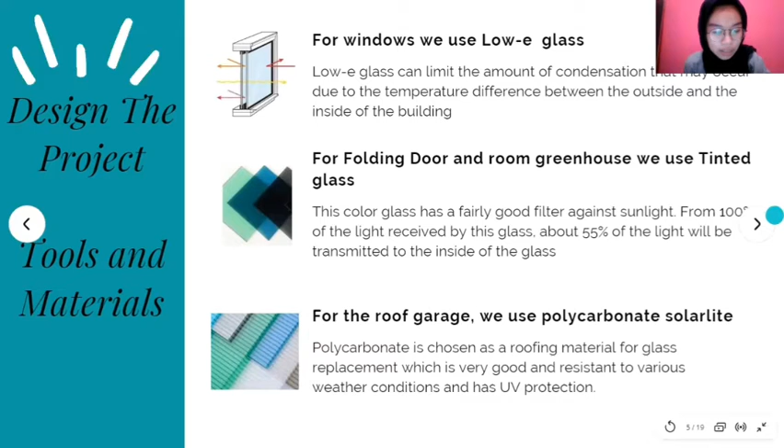Next, for the floor, we use linoleum. Linoleum is made from dried and milled flaxseed mixed with other plant material, including pine resins, wood flour, and ground cork, with a jute backing, all completely natural materials which come from renewable sources and are 100% biodegradable. All byproducts and waste are milled and used.

Linoleum doesn't fade, as the pigments are embedded in the structure. It is anti-static, repelling dirt, dust, and other small particles, making it hypoallergenic. For this reason, it is often used by people with respiratory issues such as asthma or allergies. It is also fire resistant and does not require additional finishing.

And then, the rainwater tank. Rainwater tanks help utilities reduce peak demands during summer months, saving treated water for more important and appropriate water use, and can also reduce stormwater runoff from a property. The elimination of runoff can reduce contamination of surface water with pesticides, sediments, metals, and fertilizers. Rainwater harvesting can help you save money on your water bills and store water in an economic way.

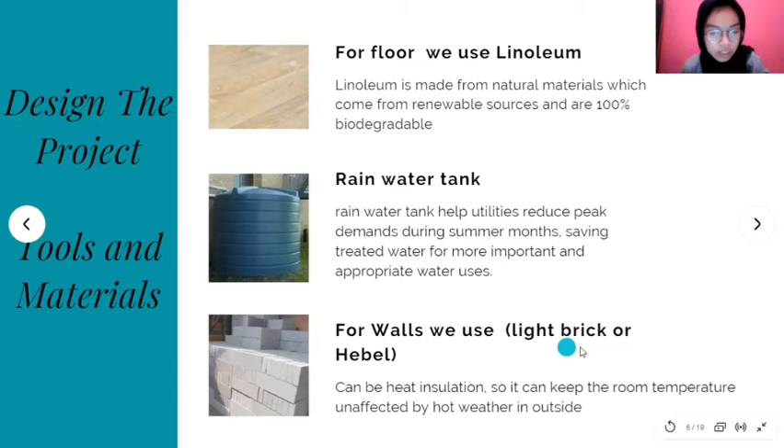And then for walls, we use light brick, or hebel, because hebel can first minimize the possibility of water seepage, since it is watertight. It can also provide heat insulation, keeping the room temperature unaffected by hot weather outside, and has good resistance to fire, so it's not flammable. It's suitable for installation in emergency staircase areas or core lifts.

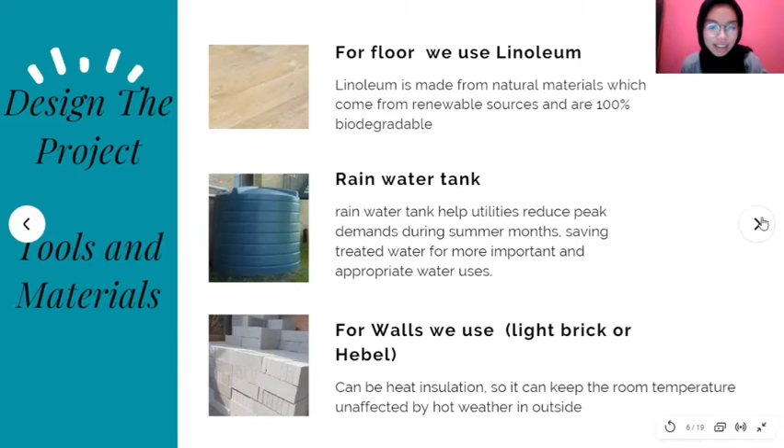And the last is heat insulation, so it can keep the room temperature unaffected by hot weather outside. And then next is for roof. For roof, we use UPVC roof materials, or we can call UPVC roofing.

The quality of UPVC roofing is undoubtedly good because it is resistant to weather. In addition, UPVC roofing material is resistant to the erosion of chemicals and doesn't contain toxic material such as BPA, which is harmful to the health of the human body. UPVC doesn't contain plastic-making additives, hence its name is unplasticized polyvinyl chloride. UPVC also has a more rigid and sturdy character and also can reduce heat from the sunlight.

Solar panels help to provide sustainable electricity for any use. Installing solar helps combat greenhouse gas emissions and reduce collective dependence on fossil fuel.

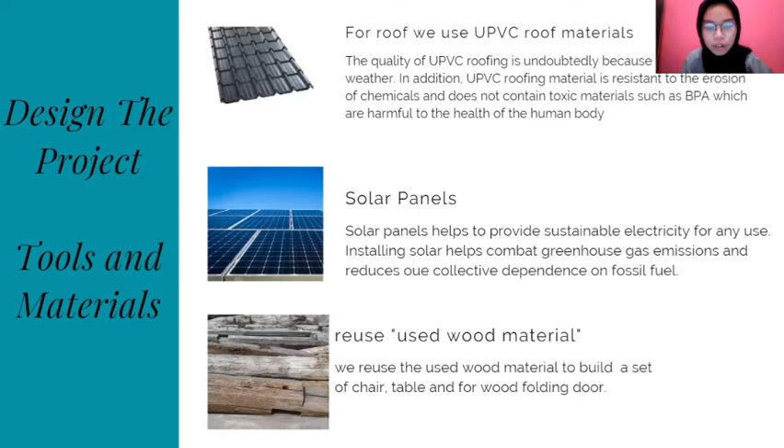And the last is reuse used wood material. We reuse the used wood material to build a set of chair, table, and wood folding door. Next slide will be explained by Rahmi.

Compared with other projects, the novelty of our project compared to common home projects is that we use a lot of windows and doors, which are designed, and also use folding doors made of glass to maximize the incoming light and provide ample air ventilation.

We also add solar panels for energy sources and build rainwater tanks to collect rainwater to be used as water for washing clothes or dishes. The floor is also designed using natural material, linoleum, which is durable and environmentally friendly. Materials such as table, chair, and folding door used wood material.

And around the house we plant trees.

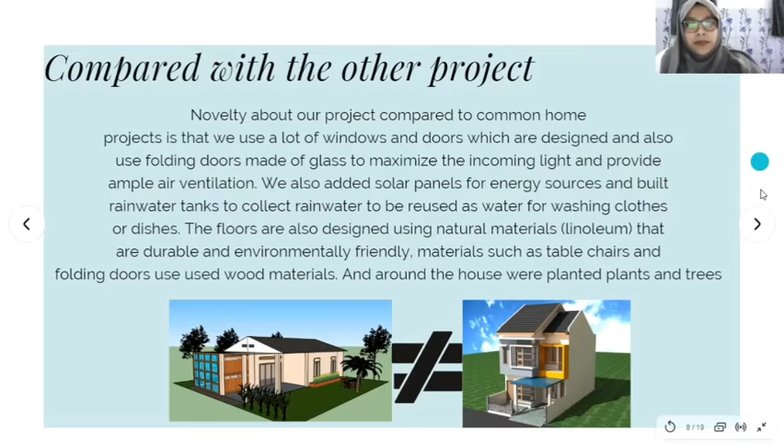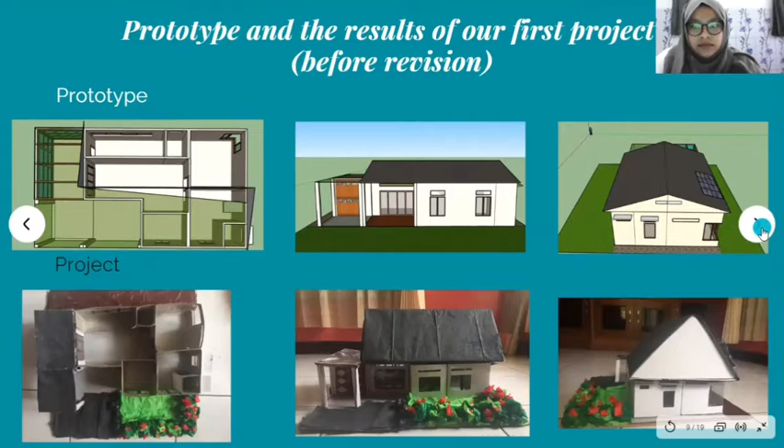So here is the prototype and the result of our first project before revision. So this is the prototype and this is the project. This is the top view, this is front house view, and this is left side view.

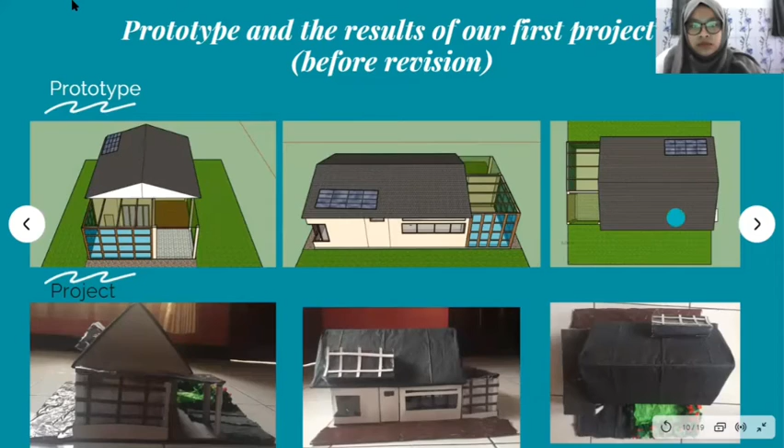Next is revision. In the first project, we only focused on the house, lacking focus on other tools, and we did not explain the material used and did not add trees around the house area.

But in the second project, we try to make a mini garden around the house and also put some trees. And we try to choose the material and tools that are suitable.

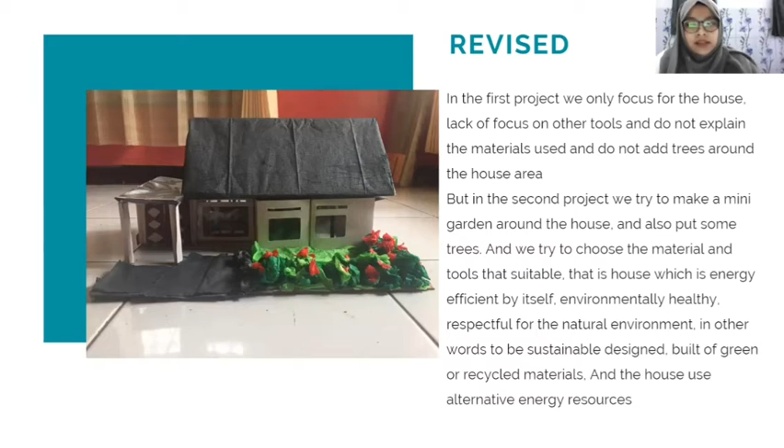That is a house which is energy efficient by itself, environmentally healthy, and respectful of the natural environment. In other words, a sustainable design built of green or recycled material, and the house uses alternative energy resources.

So the next slide will explain the prototype and the revised project, or the final project, presented by Rahmi.

As my friends told before, we use folding doors with tinted glass, and the window that we use is low-E glass, made from wood materials. It is recycled from used goods. And here is our project.

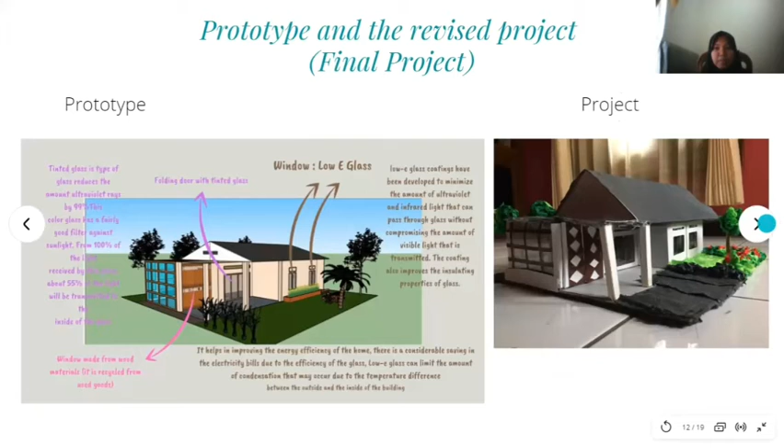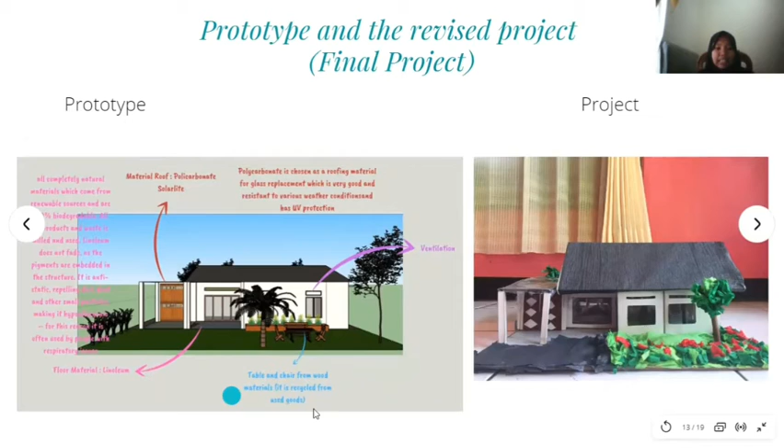The next material, the roof we use is polycarbonate Solarlite, and the floor material is linoleum. Here we use table and chair from wood materials, recycled from used goods. And here is the picture of our project.

Here we use ventilation, and as I told before, the window that we use is low-E glass. And here is the picture of our project.

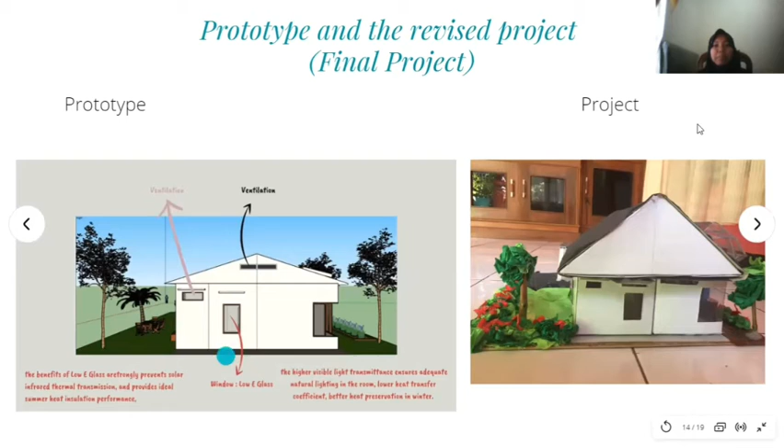We use mini ventilation in our project, and we also use a rainwater collection tank, or rainwater harvesting. And here is the picture of our project.

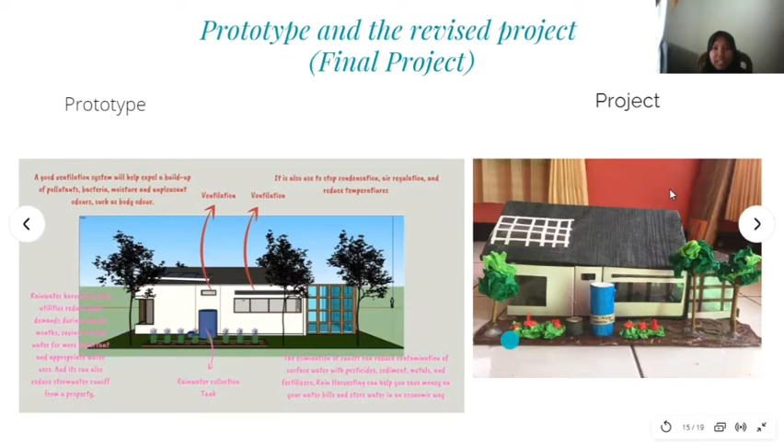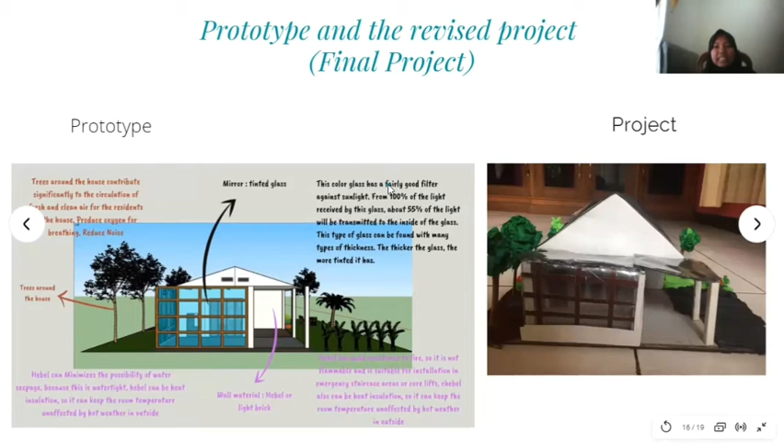And for the right side view, we use mirror. The mirror we use is tinted glass, and we also put trees around the house. And here is the picture of our project.

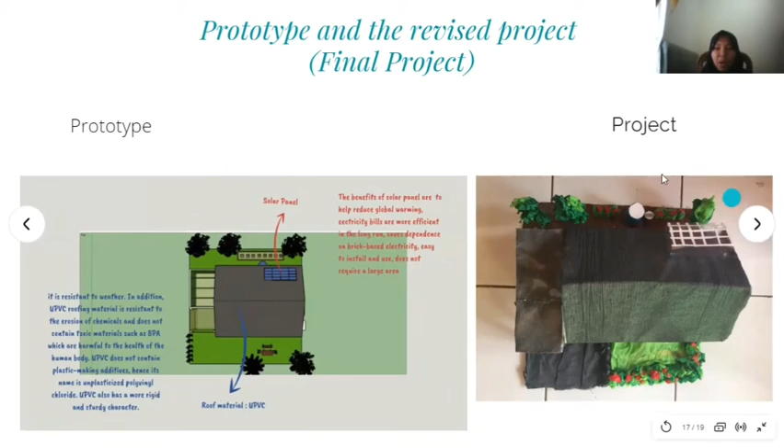And for the top view, we use solar panels, and for the roof material, we use UPVC. And here is the picture of our project from the top view.

Our project also has advantages. One advantage is that we use high mass building materials such as hebel and wood. This is designed so that the building experiences much lower temperature fluctuation between day and night, making the house more livable and reducing cooling costs.

Also, using glass material to transmit light into the house optimally, and the glass material used is also quite safe because it reduces ultraviolet radiation from the sunlight. We add more ventilation that can help expel a buildup of pollutants. We utilize solar panels to help provide sustainable electricity and rainwater tanks for reuse, and also use environmentally friendly flooring with linoleum materials.

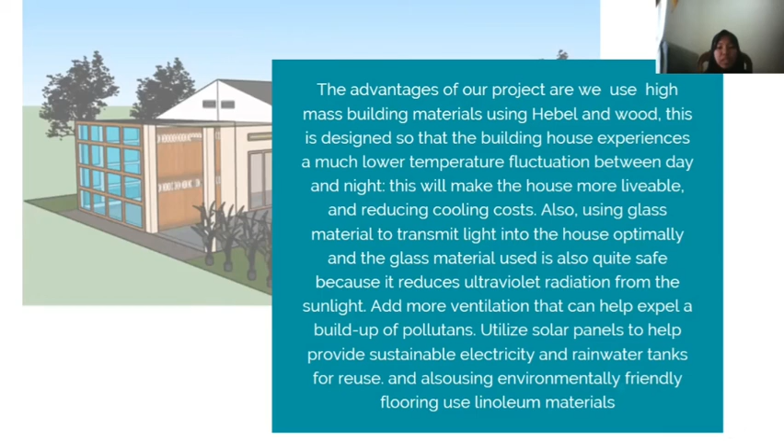We are going to show the video about the prototype and also the project. Here is the video.